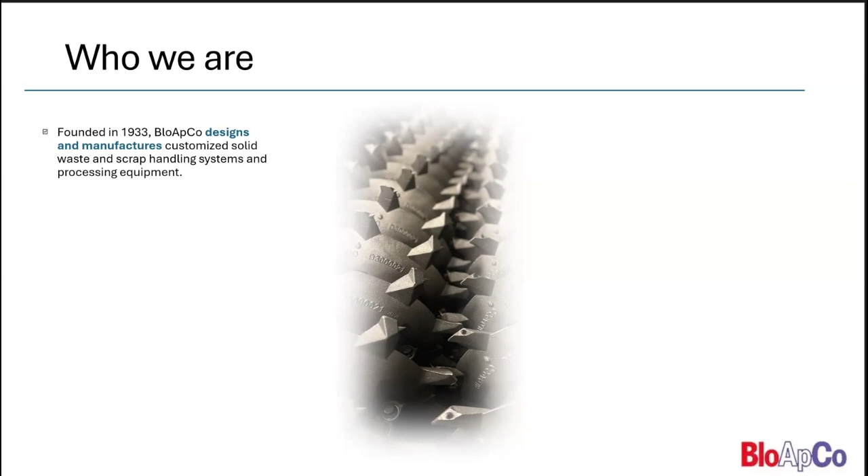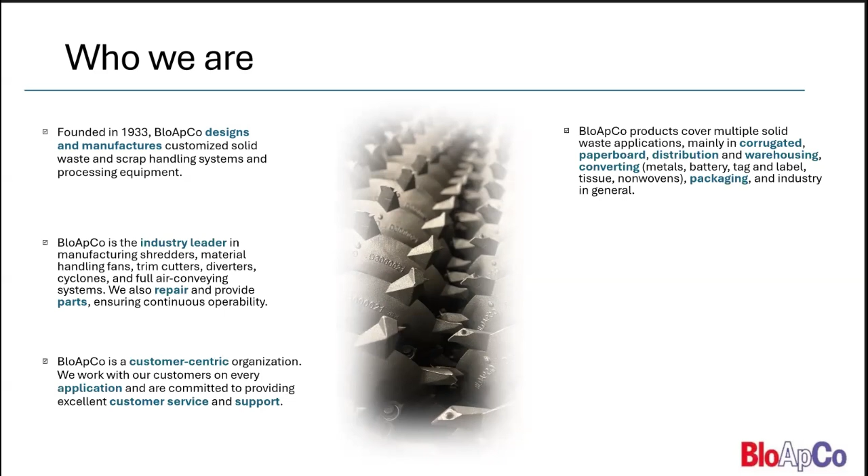We are in scrap handling, pneumatic systems, warehousing, and distribution, which would be classified in the industry section. We do everything involving material handling fans, trim cutters, and a lot of components that maybe some of you guys make yourselves, and some that you don't. We're just trying to make you aware that we can be a source for items you may not have thought of us for before.

Going forward, we always try to be a customer-centric organization where we ask a lot of questions. We try to be very sound in our applications, whether it's with a resale group or with the end users.

Our applications are going to be in everything from corrugated to folding carton paperboard, nonwovens, tissue mills, lighter gauge metals, and everything on the shredding, trim cutting, and conveying side. We've got a little bit of experience in a lot of different areas that we can be a good resource for you on.

As Frank mentioned earlier too, everything is made in America. We take a pretty good stance on trying to purchase as much as we can domestically for our components, and this year it's kind of helped us out. Tariffs aren't a big factor for us, but again, we try to do as much as we can in-house, from engineering, designing, painting, a whole ball of wax, so we can be in control of what we put out the door.

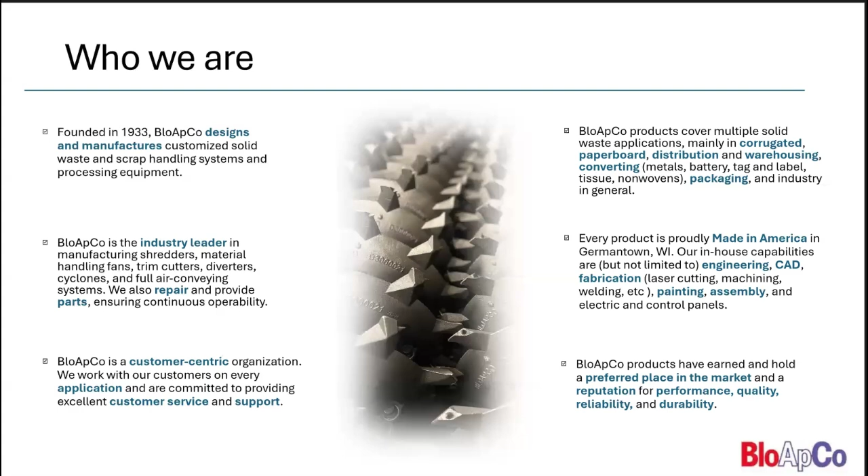The last part I want to share from the business standpoint is how we believe we can help you grow your business. We make equipment, but we also offer parts and repairs, which is an additional revenue stream for you guys. We are very serious about continuous improvement and operational efficiency.

As we've said, there are so many risks: inflationary pressure, the tariff situation. When you look at BloApCo prices, we try to pass through most of these efficiencies. These days, we enjoy a very aggressive lead time, which is a result of operational efficiency and continuous improvement.

Our prices are pretty steady. Of course, there's some price increase eventually, but not to the level of other manufacturers who see more impact in their operations. We are very serious about applications and how to help you go into other markets, and we offer a full product line. We want to be that partner to help you grow your business.

So now we'll go through a review of all the different types of products that BloApCo has to offer. All of you on this call have likely been involved with BloApCo in one of these aspects or another.

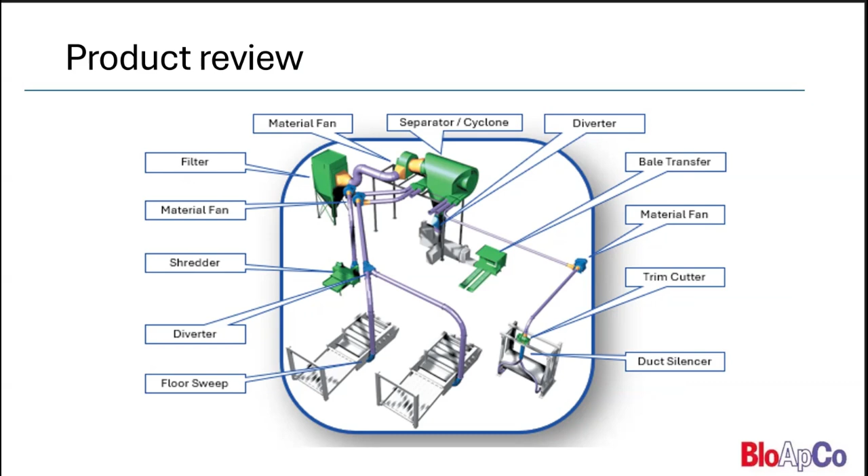We're going to start with bale transfer units. These are designed to help, as the baler is producing the bales, get the bales moved out of the way so that the material handlers can move a couple bales at a time, and you don't necessarily have to worry about the baler pushing the bale through the wall or out into the parking lot if they don't come by.

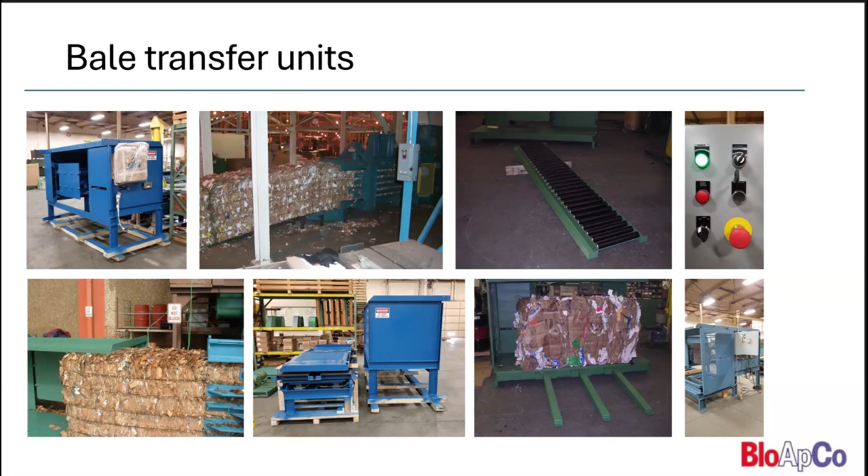Next is conveyors. If you've worked with us on shredders, you probably know that we'll typically supply the conveyor going along with it, which we customize based on any kind of width or length as needed. But we can also do conveyors on their own, for example, a conveyor that may take scrap from a collector or separator and convey it over into a baler, or for various other applications.

We've got rough top belts, smooth top belts. We can add cleats if necessary, if the material is slicker. If you've got smaller materials, we can add on skirting or a full width belt to help keep material from going underneath the conveyor belt.

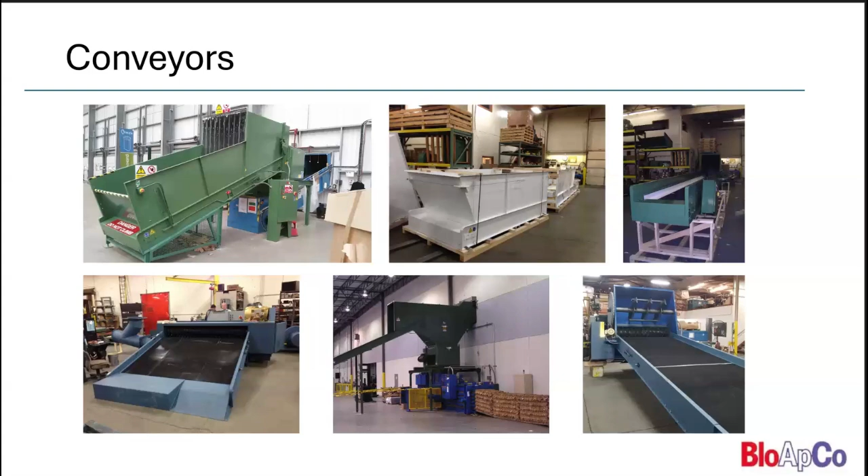Next up, we've got control panels. With our equipment, we can provide the controls and starters and PLCs and programming required to control that equipment.

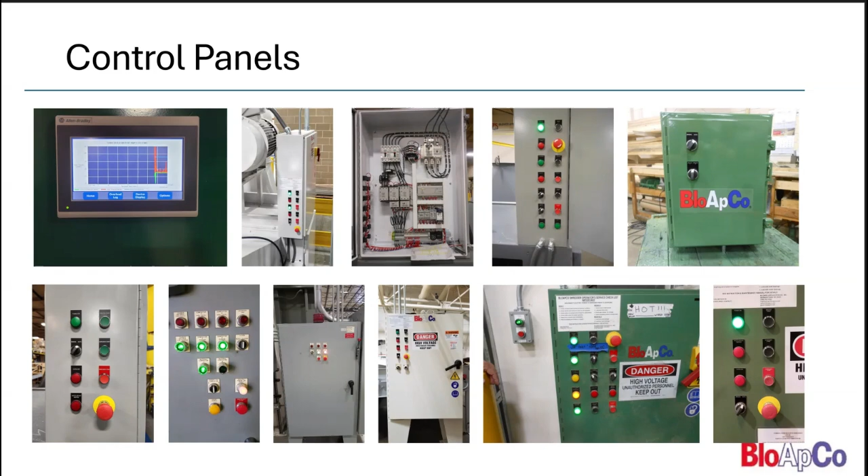We've also added additional HMIs with screens, buttons, and monitoring capabilities. A lot of times we see that customers where the equipment is back in the baler room like having push button controls to make it simple for operators, especially if they're continuously bringing on new people. It's fairly easy to get them trained up on how to operate with push buttons, and we can also add an HMI screen in addition to that.

On the panels, I'd like to also comment that we can produce UL and CE certified panels.

Next up, we've got cyclones. We also manufacture cyclones, which can separate scrap from the conveying air if you're pneumatically conveying scrap.

With a cyclone, that air could either run to a dust filter to return the air back to the plant, or, with a high enough efficiency of pulling out the scrap and a lot of the dust, you can also vent them directly to atmosphere.

We've got many sizes ranging from 36-inch diameter up to 10 feet diameter on the cyclone, so you can handle air volumes in any amount. We can also vary the number of inlets based on how many production lines you have at your facility that need to connect to this cyclone.

One comment on cyclones: they're commonly used for corrugated carton scrap, but we've designed them for light items too, like plastic films, lightweight tissue materials, and other more specialty items. So we've got some design changes for the cyclones depending upon your exact material type coming in.

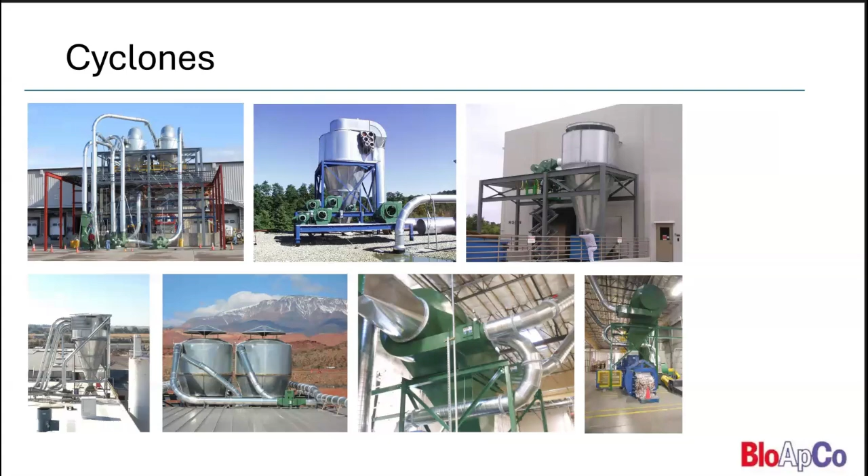Next up, we have diverters. In any case where you want to pick up material using one fan and alternate it between two different machines or pieces of production equipment, we would call that a suction side diverter. We can even do sequencing controls where you're switching back and forth every set amount of time to keep both pieces of production equipment, say a die cutter, serviced with one material handling fan.

Alternatively, we can add a diverter on the pressure side of the fan. So out of the fan discharge, you could split it, as you see in the second picture from the left on the bottom. You've got a diverter that's splitting and able to select which cyclone it wants to send the material to.

So if you had two balers, you could add a diverter in there and select which cyclone you wanted to send the scrap to based on which one is operational.

We can run the diverters using a compressed air cylinder, a pneumatic rotary actuator, an electric gear motor, or we can also do just a manual lever for very intermittent changes — all based on what suits the customer's operation, whether they've got electric or compressed air, or whether they're not going to move it as much and would prefer that manual operation.

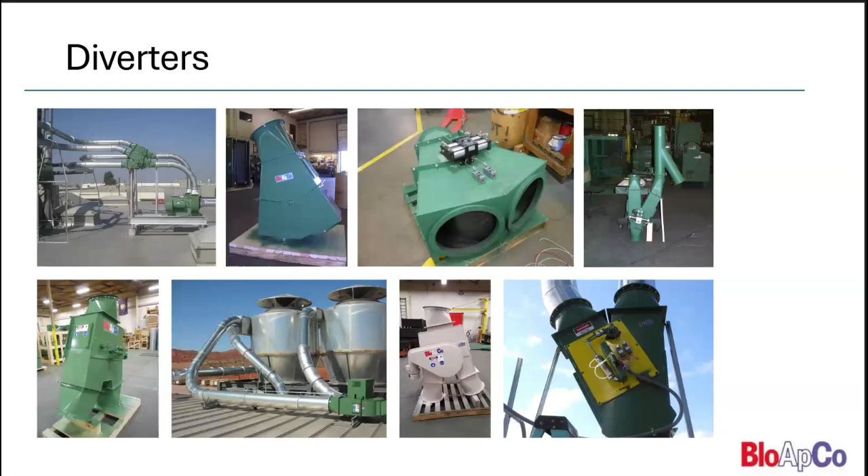Next up, we've got duct silencers. If there's a facility that is concerned with the amount of noise emission from a piece of pneumatic conveying equipment, be it a trim cutter or a material handling fan, we can fabricate duct silencers to any diameter, from 3 inches up to over 20-inch diameter, to suit the diameter of ducting being used in the application.

We build it a little bit like a muffler. We've got perforated metal on the inside, then a ring around, and an outer tube of solid metal, with special acoustic absorbing foam fill in between, which absorbs the sound waves but still allows the material to pass through the silencer.

We can do it in any given length that you need, whether it be 4 feet, 5 feet, up to 10 feet length. You can even put these in after the fact. If you've got a certain section, you could make the silencer the same length as a piece of duct, or we could supply it with companion flanges so you could cut out a section of duct, weld the new flanges in, and bolt it all back together to overall reduce the amount of noise that the operators may be hearing and complaining about.

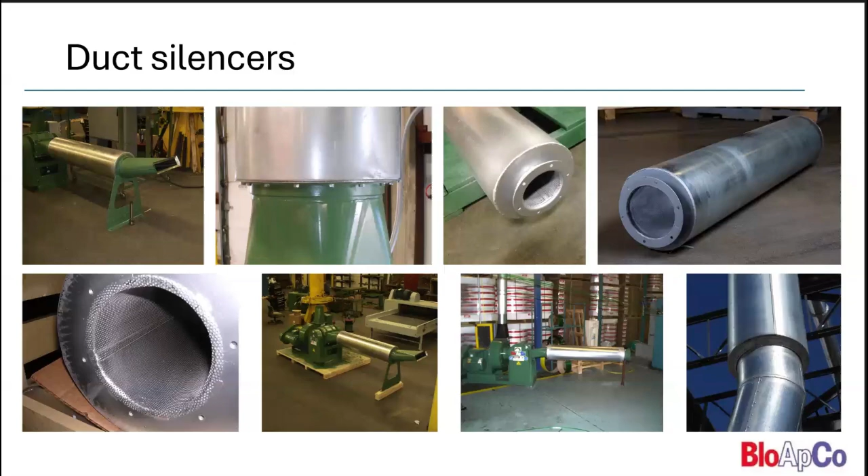Next up, that brings us to fans. We've got a number of different material handling fans. Our models range from handling a 6-inch or 7-inch duct, all the way up to a 20 or 22-inch duct.

We can work with you on the sizing, asking the questions needed to properly size the fan. Our material handling fans are very heavy duty, built to convey large chunks of material and run for decades. They have a design that's been fine-tuned through decades of BloApCo's history, and is now a very robust design that lasts a long time.

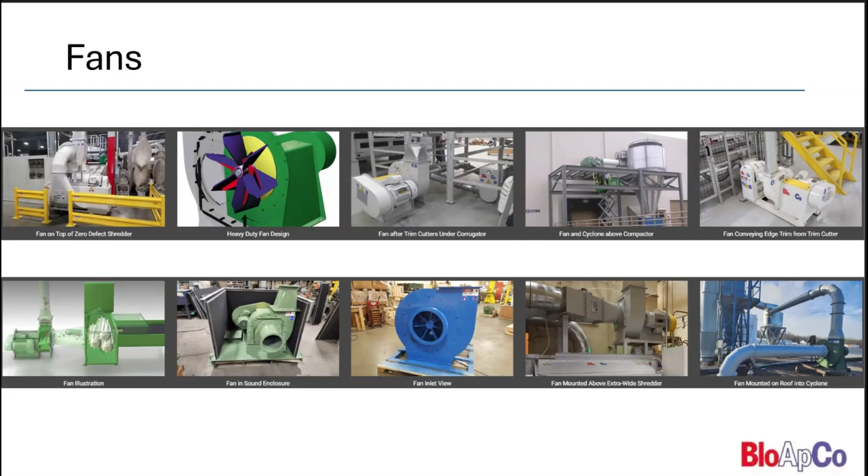Next up, we've got filters. Like I mentioned with the cyclones, they can discharge outside, or they can run through a filter and be brought back into the plant. There's a number of different filter options we can do depending on the type of material, the application, and local regulations, whether it be a hanging bag style filter or a pulse jet style filter, along with balancing fans to help reduce the overall back pressure felt in the system.

When you're talking dust filters, these are all air system ones, but if you're doing a piggyback shredder at a warehouse distribution center type of thing, we also offer dust filters for the back of shredders. If somebody is real dust conscious, shredders are pretty low to begin with, but sometimes the situation requires a very clean environment. So we do offer that, and we can quote as many options as needed.

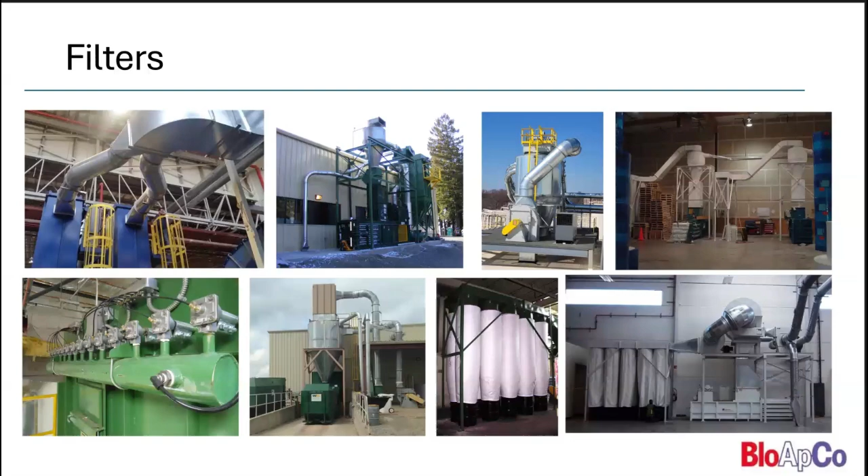Next, just a quick note on fittings. Our material handling fans and trim cutters have standard round or square inlets and outlets. We can also add inlet and outlet fittings to get you to the exact diameter of the ducting you're planning on using throughout the rest of your system, so you don't need to fabricate that transition piece yourself.

We can do just a simple taper to a different diameter. We could do a Y where you're pulling in from two locations or more. We've done some fittings with 4 to 6 inlets if you're pulling from that number of pickup points. And we can adjust the ring flange as needed, whether it's the standard angle flange, a Kirk and Blum, or Nordfab ducting—we can put that adapter piece right on the end coming out from the factory.

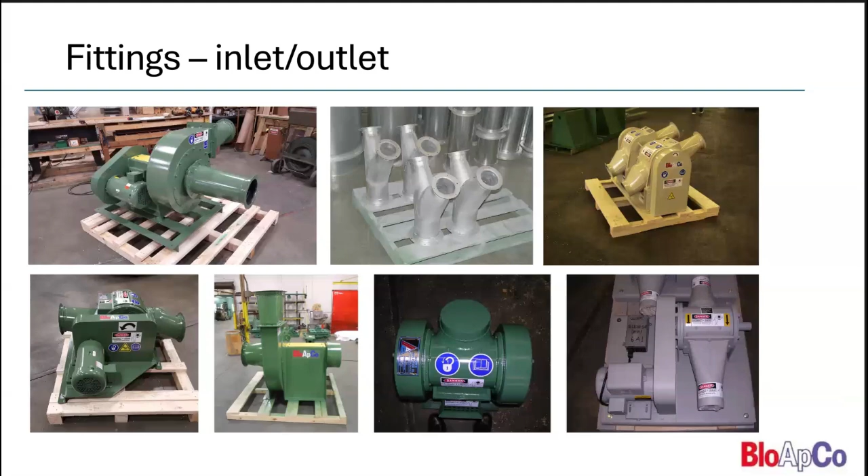Next, we've got floor sweeps. These are sometimes options put in along with a shredder that's back in a baler room, giving the opportunity to sweep up a broken bale. Sometimes there's a standalone fan dedicated to that floor sweep that can be turned on when you're feeding that material back in. And when we tie it in with a shredder, we've got a pan that blocks off the inlet when you've got that Y fitting.

So you can choose whether you want to pull air through the shredder when you're shredding, or whether you're looking to pull air from the floor sweep. They're designed to handle operators—made of probably 10 gauge material, designed for operators that aren't as careful when sweeping stuff up. They're not going to get damaged in that regard.

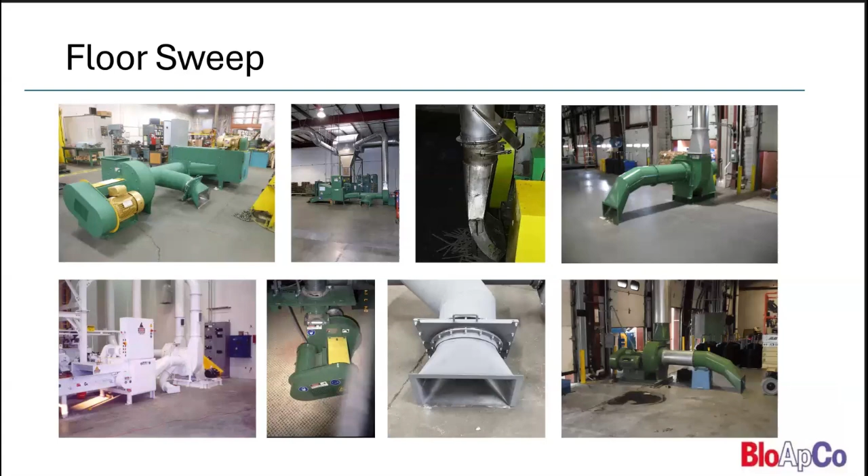Next, that brings us to oil mist units. Along with some of our trim cutters, if we're in an application handling pressure sensitive adhesive, we would include an oil mist unit using a basic mineral oil to coat the inside of the trim cutter and the ductwork with a light layer of fine droplets, keeping the adhesive from sticking and building up within that trim cutter or causing plugs in the system as it continues on.

We've also done some other oil separator type units at aluminum can facilities where their machines use a lot of oil to run, and they would have issues with the amount of oil coming out the bottom of their cyclone. We've done oil separators as well to help capture and drain that oil out before it makes it to that separator.

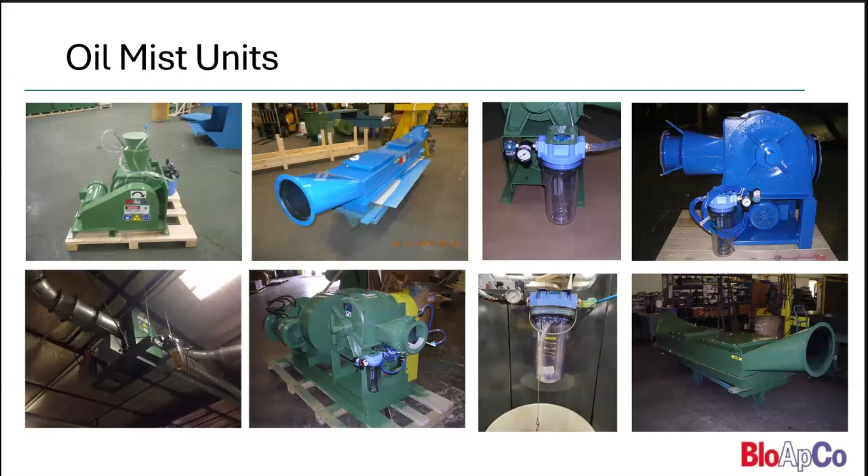Next, we've got safety drop plates. If you've worked with us on shredders, you probably know that we've got safety drop plates as standard with any shredder application and implementation out there. The purpose of this is a passive means of safety, meaning the operator, or someone who falls onto the conveyor, doesn't need to actively reach out and pull a safety pull cable or hit a safety e-stop button.

The passive means of safety is that if anything 70 pounds or more falls on that conveyor and runs over the safety drop plate, it will trip the spring tension linkage, tripping the limit switch and tripping out the safety circuit with the associated piece of equipment, be it a shredder or a conveyor system, stopping that conveyor immediately and keeping something or someone from falling into the shredder.

We can also put these safety drop plates on conveyor systems that don't have a shredder, if the customer is just looking for that additional safety of someone falling into the baler, which can be just as dangerous. So we can work with any of the major conveyor companies to supply the identical width and the same bolt hole pattern, so this safety drop plate can be installed just like a piece of conveyor. The only additional thing would be wiring the limit switch to the associated safety circuit.

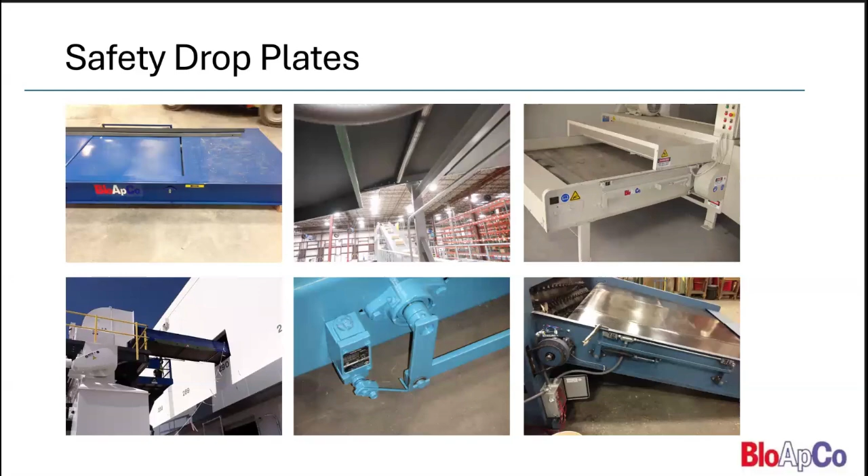Next up, we've got shredders. Our shredders are designed with three or more counter rotating shafts to pierce and tear material using low RPM but high torque with the shafts. So you get high shredding throughput with low noise, low amount of dust generated, and very good operator satisfaction because they don't need to wear double hearing protection like they may need to with some of the higher speed hogger type units.

We do many shredder widths ranging from 36 inches wide up to 110 inches wide, based on the width of the scrap that your customer has and the amount of space they have within their facility. We can also do a number of other options, be it angled incline conveyors, or if material's on the floor we can do our standard horizontal. We can add additional shafts if need be, if they've got some taller items that need shredded.

We've also done some pickup boot shredders handling larger die cuts that may cause an issue when being conveyed through the scrap system. Additionally, we've done piggyback shredders, which are mounted directly above a baler, where the material runs up an incline conveyor, gets shredded, and falls down directly into the baler.

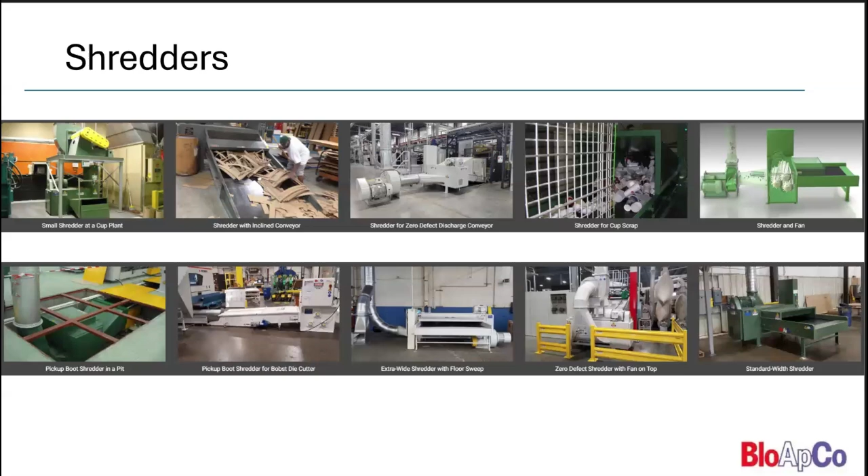We've also done, instead of our 3-shaft shredder, a 5-shaft shredder that has a larger bite and can handle high throughput of moderate sized boxes that would normally overwhelm a baler, especially when it hits its tie cycle.

The benefit of the shredder is that it helps your baler work more efficiently, and the entire conveyor system throughout the facility doesn't need to stop whenever the baler hits a tie cycle, because that can cause a lot of issues with empty boxes getting jammed on the conveyor, and then maintenance needing to go and break those up.

And then to the left on this screen, we've also got a small core shredder that we can do if a customer is looking for a standalone shredder to process cores from their corrugated or paperboard plants. We also do an even larger core shredder for if you're at a recycling facility getting truckloads of cores brought back, or a core manufacturing facility that has a lot of cores being scrapped or brought back from customers that are done with them. So a lot of options on the core shredding aspect.

When you're looking at the shredders, as Isaac said, we've got generally between 3 and 5 counter rotating shafts, and we can put box crushers on. We've added even extra shafts, a 6 shaft, depending upon what we're doing, and we can roll them pure vertical or horizontal. There's a lot of different variations. So if you're looking at any of the BloApCo literature, pictures, what have you, and you don't think something there is going to work for you based upon your product or maybe space available, give us a call.

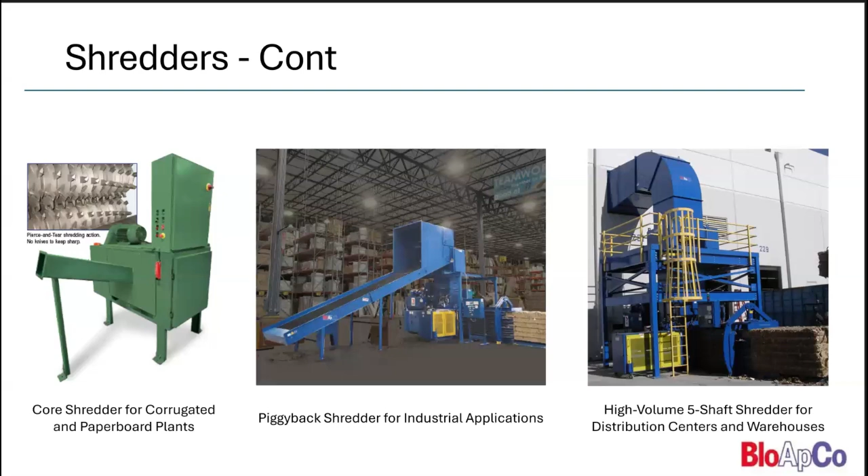There's decades and decades of different orientations and designs that we can work with you on. So just keep that in mind. If you give us a call, there's usually a drawing that we've done throughout our history. And if not, we have engineering services to create a brand new sales or general arrangement drawing as necessary to help in your conversations with your customers, to have that drawing that you can mark up and change and revise as needed.

Next we've got sound enclosures. These are basically what their name says. They're enclosures that have an acoustic dampening material on the inside with baffled vent holes to allow the heat from the motors to escape, similar to the duct silencers, to reduce the amount of noise heard by the equipment operators and improve the workplace by reducing noise, which has been a big push from a lot of customers we've heard on our end, is reducing noise for their operators.

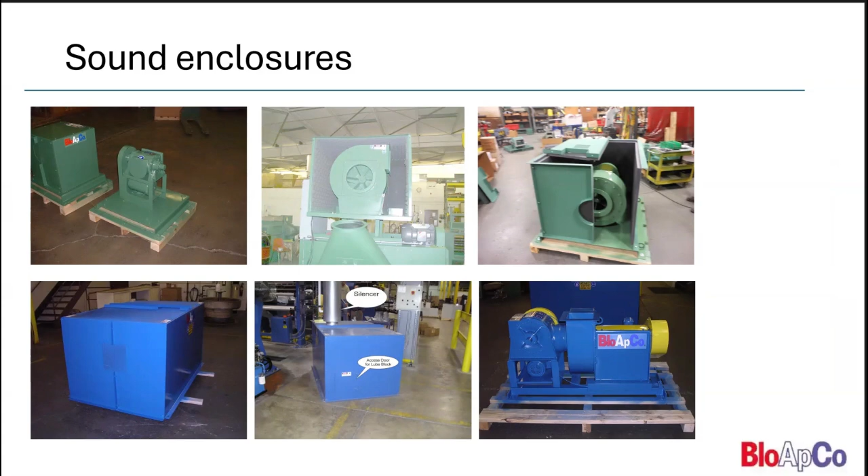That brings us to trim cutters. We've got over half a dozen different trim cutter models, each built to last using cast iron castings and aluminum cast covers or full fabricated housings. These are very heavy duty. They've got replaceable knives that can be sharpened and can handle materials ranging anywhere from half a thousandth of an inch up to a quarter of an inch thick. We've got different trim cutters for any application out there. If it can be slit, we can cut it.

We've got a lot of the literature on our website, but if you've ever got any sort of edge trim application, feel free to give us a call. We're more than happy to help select the perfect trim cutter for your application.

I think of the trim cutter manufacturers, we've got probably the broadest selection of models and the most unique setups and arrangements out there for the different applications. Like the shredders, keep in mind that we can do a lot of different things. If something comes to mind that doesn't quite fit, could you possibly do this? Give us a call. We've arranged them in so many different ways over the years that we try to be real user-friendly in our design and application.

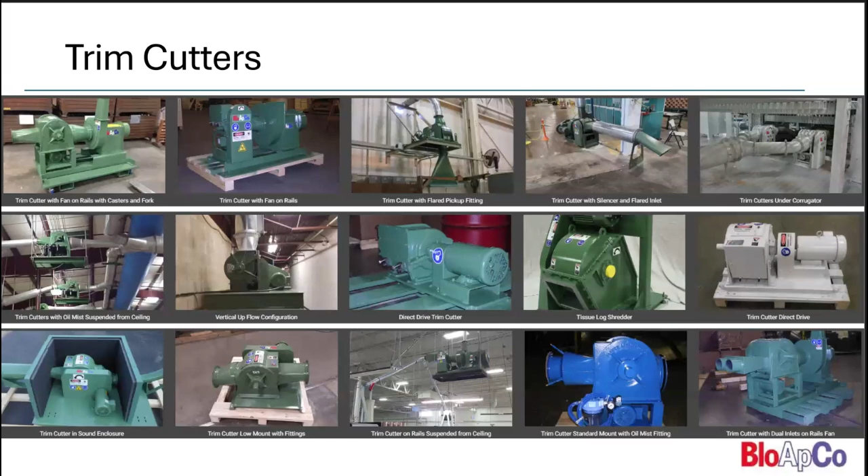Ranging anywhere from our model 7.9 trim cutter that can cut anything as thin as half a thousandth of an inch, up to our model 13.3 tissue log shredder that can handle basically a roll of bath tissue that's 10 feet long and chop that up. That kind of gives a good range of what we can cut.

Next we've got Venturis. So with this, if you're looking for something where you don't want to cut the trim, we can supply a Venturi that will just provide the suction and pull and push the continuous ribbon all the way back to your collection point.

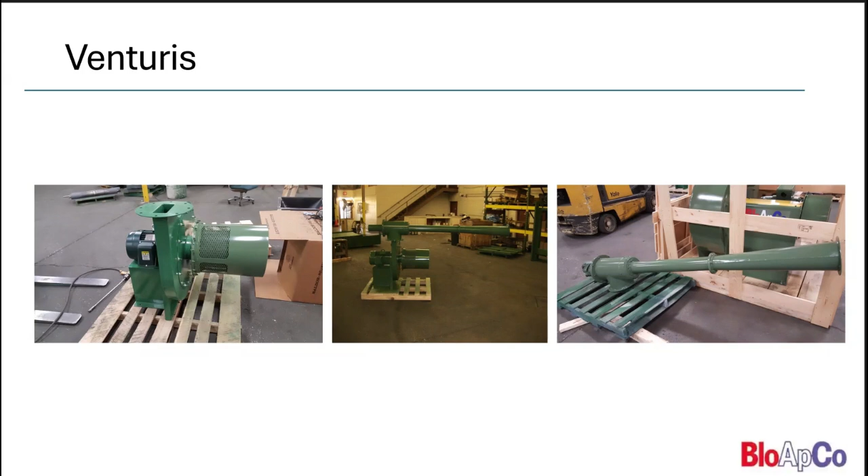This is most of the things that we've done, but to add on to it, we have other services, like I mentioned, with engineering to either design new configurations or just draw and model up these shredder options for discussing with your customer. We've got applications engineers to help with sizing up the equipment, so that we can be the BloApCo equipment experts that give you the information you need to have an informed discussion with your customer on the reasons why you might want to consider certain applications or items when speccing out scrap handling equipment.

We've shown some of the customizations that we can do, but that's by no means a limitation. We're always open to continuing and adding on more customizations based on the different applications that you have.

We're located in Germantown, Wisconsin. Like Dan mentioned, we build all of our equipment here. We've had resellers bring customers in if they're close to buying, but just want to see if they can come here to Germantown and see out in the shop where we're building all of our equipment.